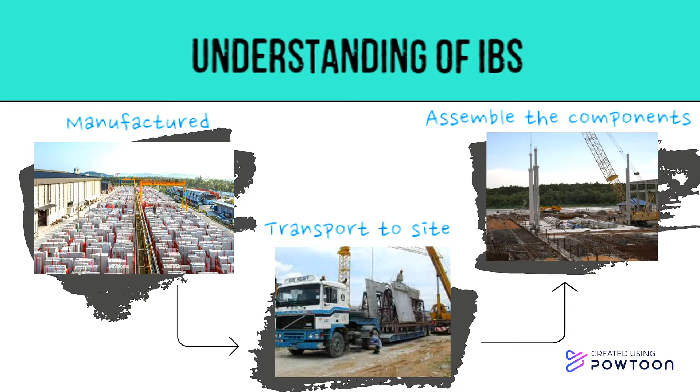Industrialized building system in Malaysia. 1960, IBS was initiated since the 1960s when the Ministry of Housing and Local Government made visits to several European municipalities with the objective of assessing their housing development plans.

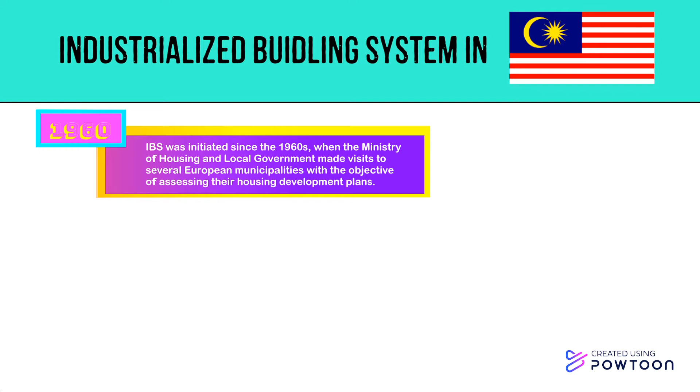In 1964, the first such project took place on Jalan Pekeliling in Kuala Lumpur, beginning in 1964, creating 7 blocks of 17-story flats alongside 4 blocks of 4-story flats as well as 40 blocks of shops.

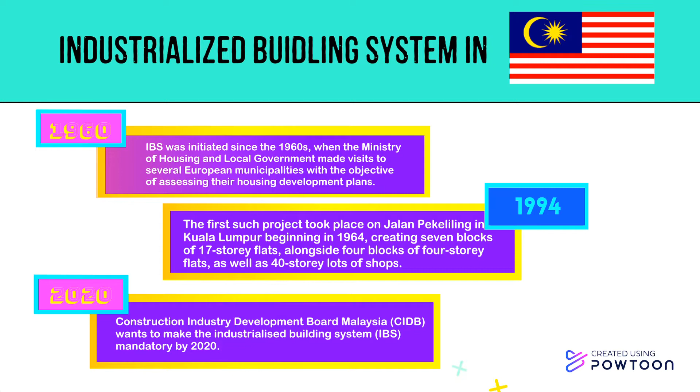And in 2020, Construction Industry Development Board Malaysia (CIDB) wants to make their Industrialized Building System IBS mandatory by 2020. The use of industrialized building system. All building components such as wall, floor, slab, beam, column and staircase are mass-produced either in factory or site under strict quality control and minimal on-site activities.

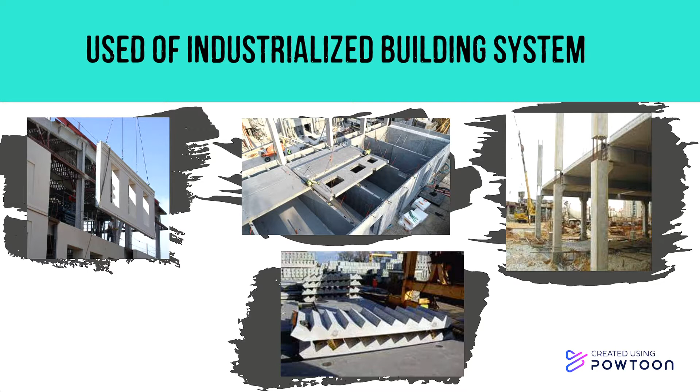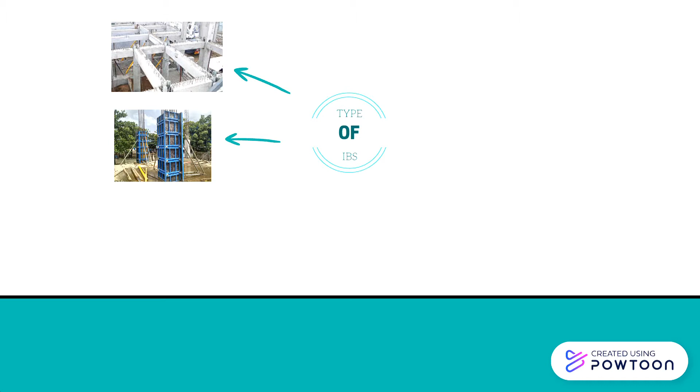Types of IBS. First is precast concrete system. Example is PC column, beam and slab. Second is formwork system. The example is steel form, beam and column molding form. The third one is steel frame system. The example is steel beams and columns, portal frame. Fourth is wood frame system, timber frame, prefab timber. And the last one is block system, interlocking concrete masonry unit, lightweight concrete blocks.

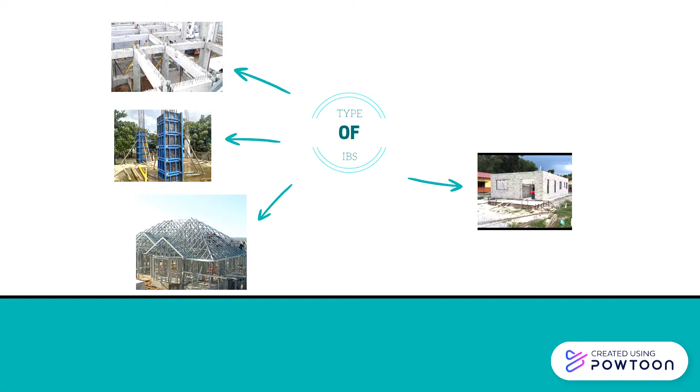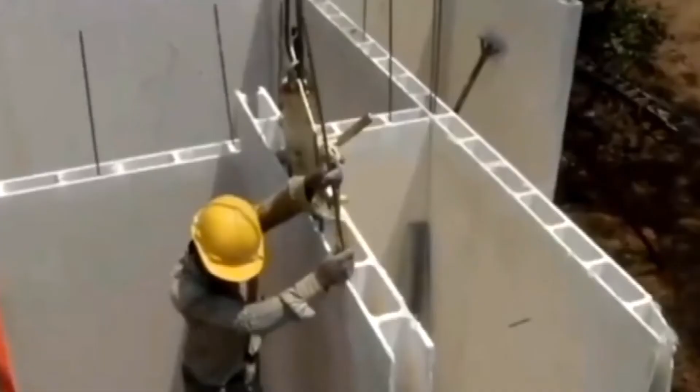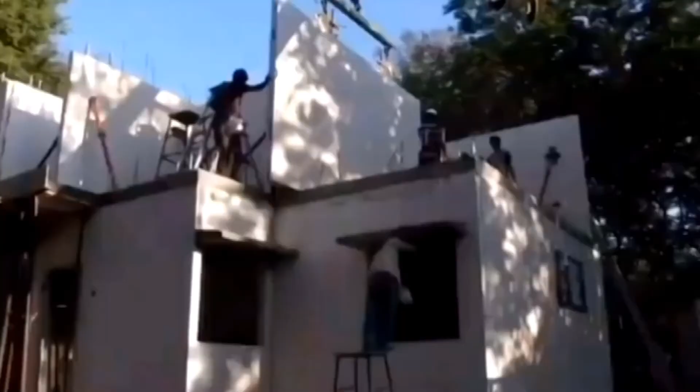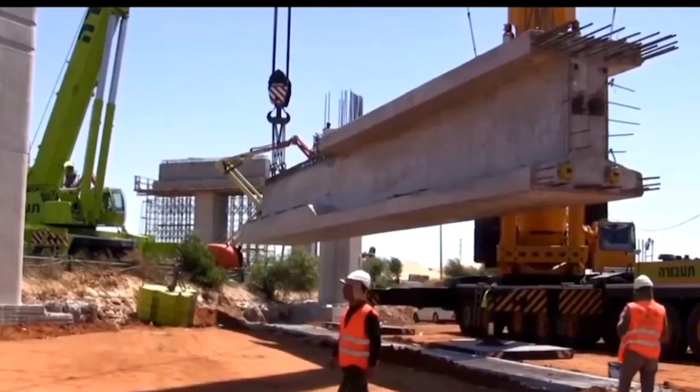I would like to talk about IBS. IBS sustainability. First of all, IBS can save energy and resources, recycle material and minimize the emission of substances. Second, IBS is a system that harmonizes with the local climates, tradition, culture and the surrounding environment. Third, IBS is able to sustain and improve the quality of human life at local and global level. Lastly, IBS can save and increase workplace productivity.

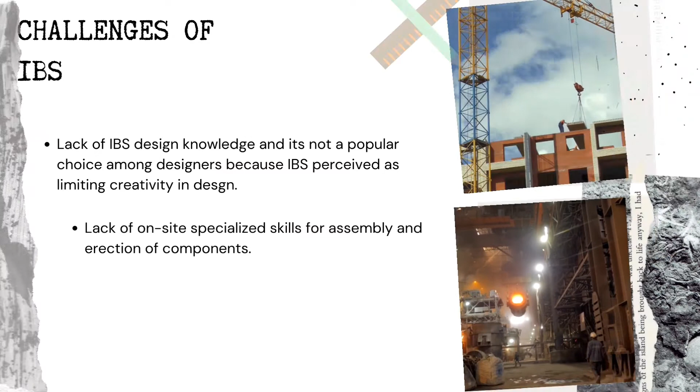Then, challenges of IBS. Lack of IBS design knowledge, and it is not a popular choice among designers because IBS is perceived as limiting creativity in design. And lack of on-site specialized skill of assembly and erection of components. After that, another challenge of IBS is the development of standard plans and standard components. Lastly, lack of quality control in smaller IBS manufacturers.

Advantages of IBS. First of all, less construction time. IBS requires less construction time because casting of precast elements at factory and foundation work at site can occur simultaneously, and the work at site is only the erection of IBS components. Then, cost saving. The formwork of IBS components is made of steel, aluminium or other materials that allow for repetitive use, and this leads to considerable cost saving.

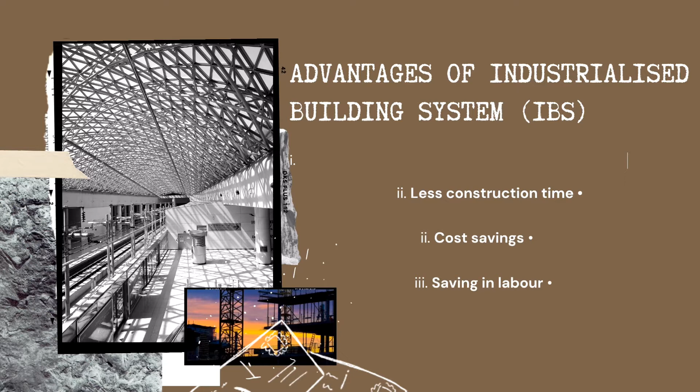Third is saving in labor. The use of labor will be reduced and lead to saving in labor costs. Next is less labor at site. Use of IBS will reduce the construction process at site and consequently reduce the number of labor required at site. Optimized use of material. The utilization of machines during the production of IBS components leads to a higher degree of precision and accuracy in the production.

Then higher quality and better finishes. IBS components have higher quality and better finishes due to the careful selection of material. Better and strict quality assurance controls since production in factory is under a sheltered environment. Then construction operation is less affected by weather. Faster project completion due to rapid all-weather construction. The effect of weather on construction operations is less because the fabrication of IBS components is done in factory while at site is only erection of the components.

Next is flexibility. IBS provides flexibility in the design of precast elements so that different systems may produce their own unique precast construction method.

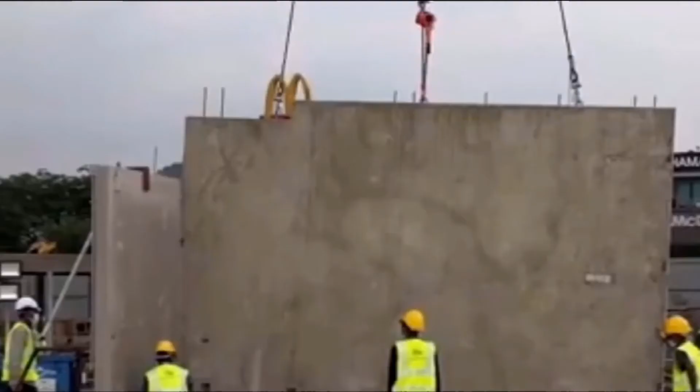After that, increased site safety and neatness. The utilization of IBS components leads to less construction process, especially wet work at site. This will lead to neater site conditions and increased safety. Lastly, environmentally friendly. The use of IBS will decrease the use of timber formwork on construction projects. These are some pictures of the advantages of the industrialised building system, IBS.

Then, disadvantages of IBS. First of all, high initial capital cost. The initial capital cost of IBS is usually high. The initial cost includes the cost of constructing the factory, casting beds and support machinery. Cost effectiveness can only be achieved when undertaking large projects.

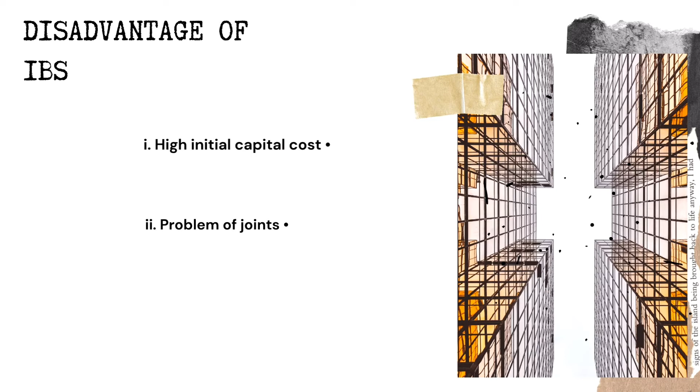Second is the problem of joints. Water leaking is often the major problem in buildings constructed using IBS. This problem is more obvious in Malaysia where rain occurs throughout the year. Next is sophisticated plants and skilled operators. The prefabrication system relies heavily on sophisticated plants, which have to be well coordinated and maintained by skilled operators. Breakdown in any one section would hold up the entire production line.

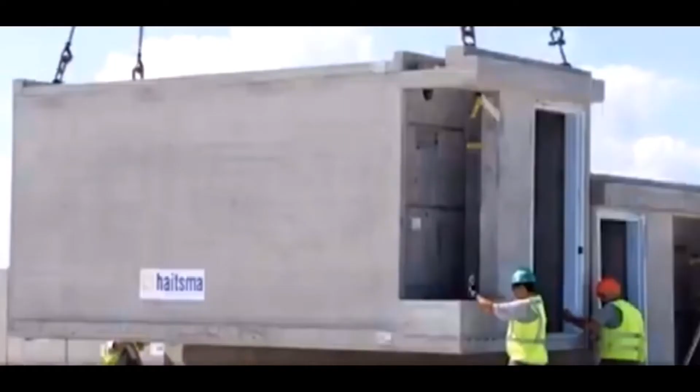Then, site accessibility. Site accessibility is one of the most important factors in the implementation of IBS. IBS requires adequate site accessibility to transport IBS components from the factory to the site. Lastly is large working area. Building construction using IBS requires a large working area for the factory, trailers, tower cranes, and storage for the IBS components. These are some pictures of the disadvantages of the industrialised building system, IBS.

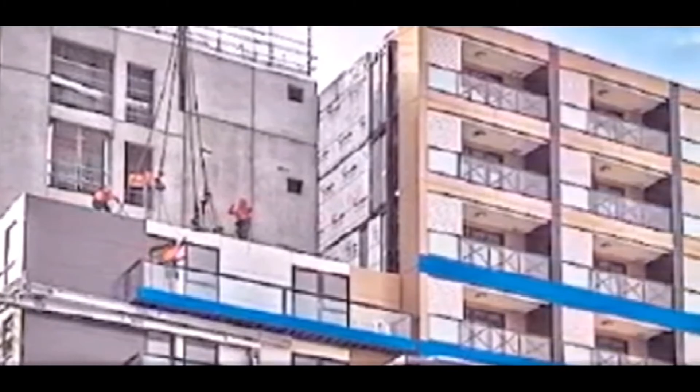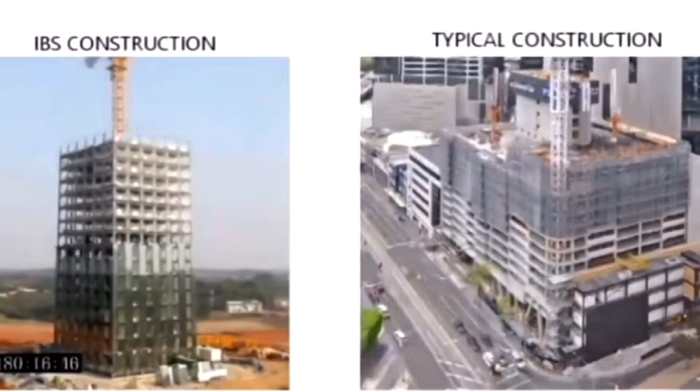IBS in construction versus typical construction. This technology enables reuse for recurring processes. Using IBS in construction will help speed up delivery time and build affordable, quality houses better than typical construction.

Hello everyone, my name is Farhanizam. I will explain the case studies for this topic.

For the first case study, Construction Research Institute of Malaysia, CREAM, technical expert Prof. Dr. Zuhairi Abdul Hamid revealed that the number of components that can be produced by IBS manufacturers in Malaysia is only enough to build around 25,000 housing units annually, Bernama reported. CREAM is the research and development arm of the Construction Industry Development Board (CIDB). This means they can only supply 25% of the components needed under the government's 100,000 affordable units plan in a year, he said. Malaysia currently has around 274 IBS component manufacturers and 26 IBS distributors registered with CIDB.

For the second case study, an industrialized building system company will invest around 100 million in its production and research and development. This will also open up 180 new jobs when the plant is in full production. The facility, which will create modules aimed at residential apartment buildings, will be the most modern upon completion. It will be able to produce around 500,000 square feet of apartment modules per year.

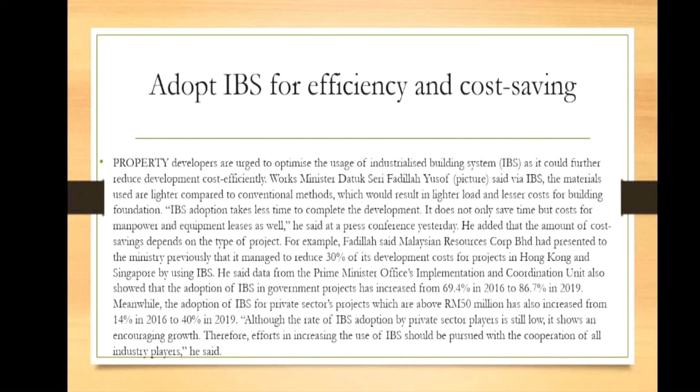Data from the Implementation Coordination Unit of the Prime Minister's Office also prove that the use of IBS in government projects has increased from 69.4% in 2016 to 86.7% in 2019. Meanwhile, the use of IBS for private sector projects exceeding 50 million also increased from 14% in 2016 to 40% in 2019.